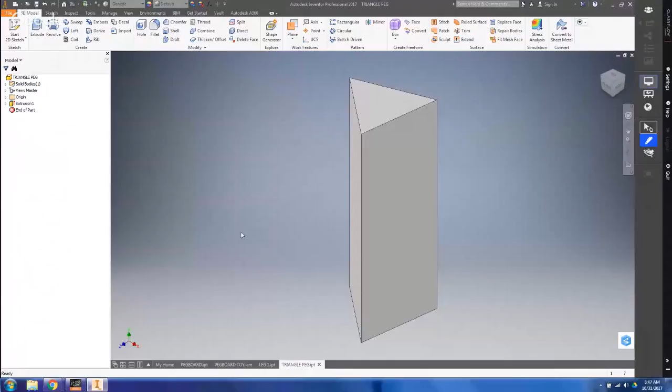Here's the triangle peg we had made, and now we need to go back and edit our pegboard part so we can add a triangle hole in it. Here's our pegboard part, I had already opened it up. Let's go ahead and make another sketch on this face.

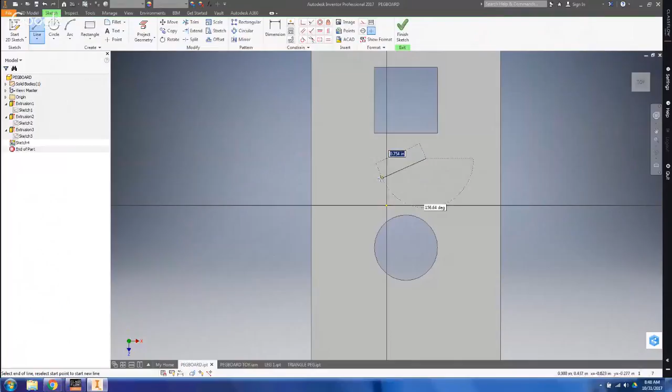I'll draw a triangle on the face here. It needs to be an equilateral triangle, so all sides need to be equal. I'm going to use that equal constraint on the ribbon to set all the sides equal.

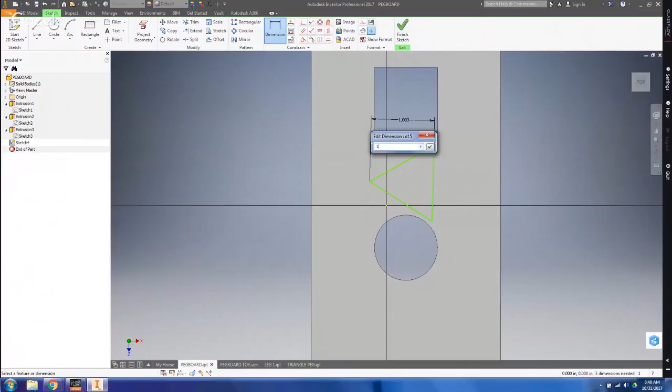It needs to have a height of 1 inch, so from here to that top point there should be 1 inch. That's pretty close already. I'm going to constrain some things so they're parallel — I want this here to be parallel to this. That just kind of makes our triangle so it's not crooked in there as a whole.

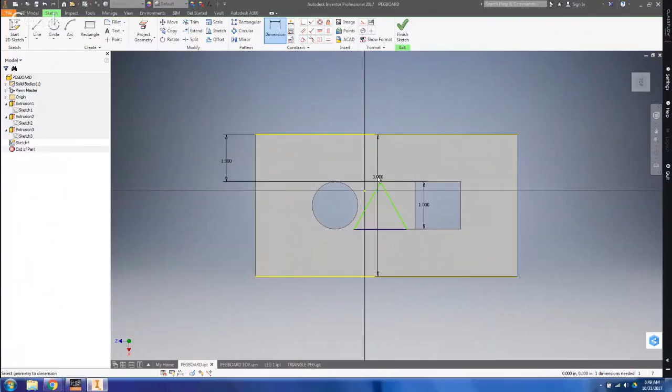I need to constrain a dimension here with the side of this face so the position of this triangle is 1 inch from it. And we actually need to center it too — I didn't think about that. So from here to here, that side to this top point.

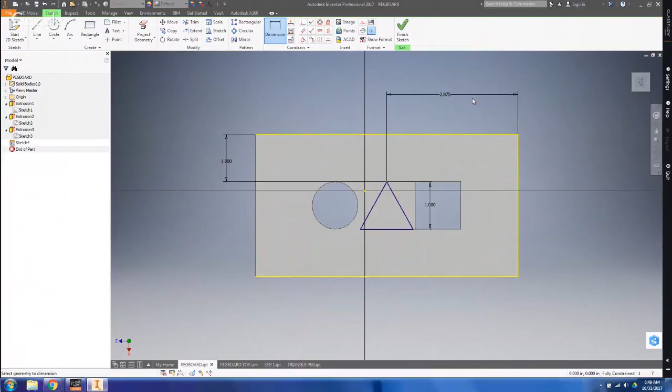I'll show you a little trick you can do here. I'm going to set this equal to 5.75 divided by 2, so that's half of that distance, and it does the math for me. It's 2.875 inches. It's a little tight, so I'm going to finish the sketch and extrude the hole.

I'm going to change the direction of it all the way through. And there it is. It's tight, it works, but I'd like to add some more space so these are equally spaced.

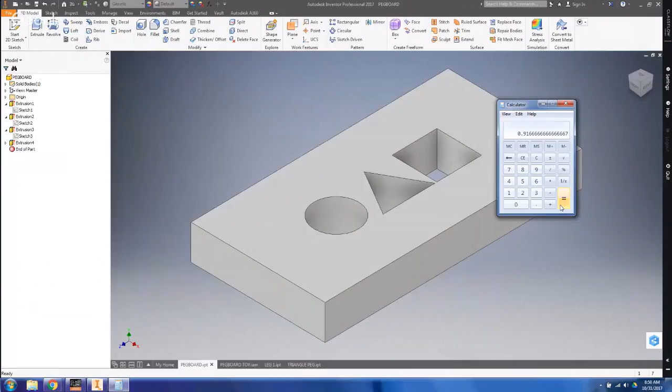Since this is 5 3/4 inch, and I know these holes take up 3 inches, that gives me 2 3/4 inches left over. If I divide that into 3 equal spaces, let's do some math here: 2.75 divided by 3, so that's about 1 inch from each other. I think I'll just go with that — I'm not going to mess with fractions of inches, I'll just go with 1 inch.

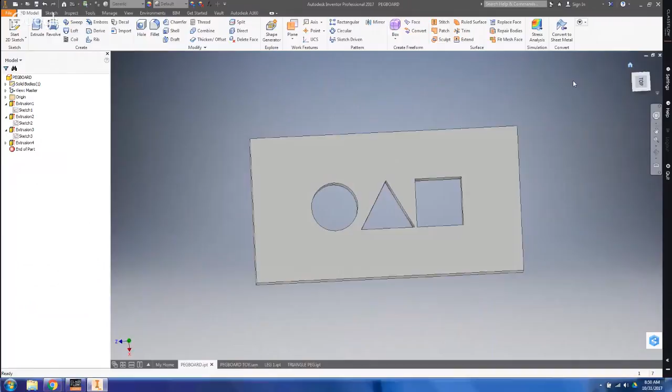So what I'll do is go back and find my circle extrusions — there it is, and inside here is my sketch. I'm just going to change this dimension to 1.5 inches, put it a little bit to the left. I'll finish that sketch, so that gives me a little bit of space there.

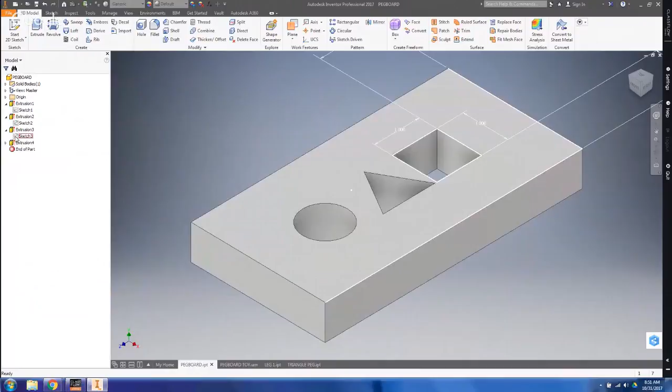I need to find my extrusion that I did on the square — there it is, there's a sketch there. I'll double click on the sketch. When you double click on the sketch, make sure you click on the sketch icon, not the letters, because that will just change the name of your sketch. So double click on the icon. Here this is — we're going to set this to be 1 inch.

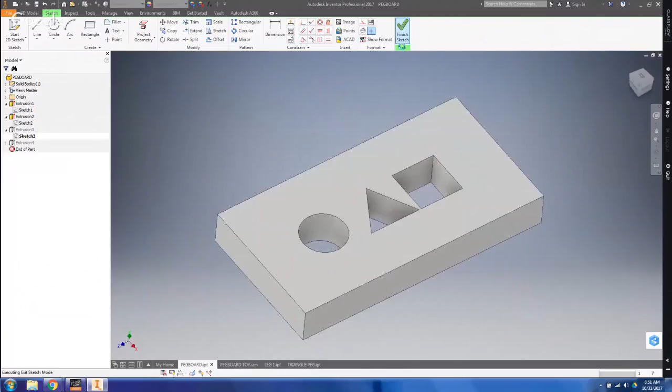Although they're not perfectly equally spaced, things are spaced out a little bit better. Okay, so that's what we're going for. When we save this, we'll update our assembly — save it real quick, and we'll go back to the assembly.

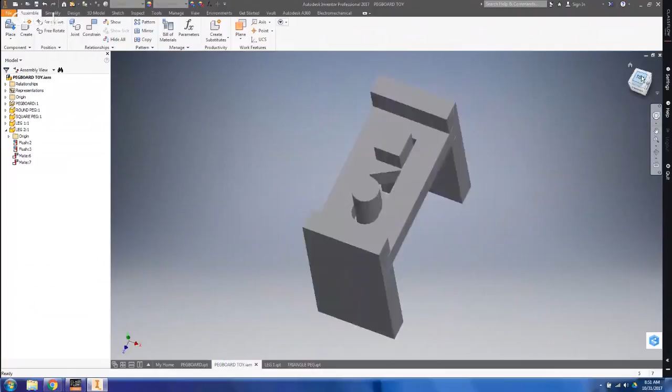Voila, there is our hole going on here. I think maybe we need to update the — oh, there it goes, the pegs went into the hole now. That's good, I was wondering what was going on there.

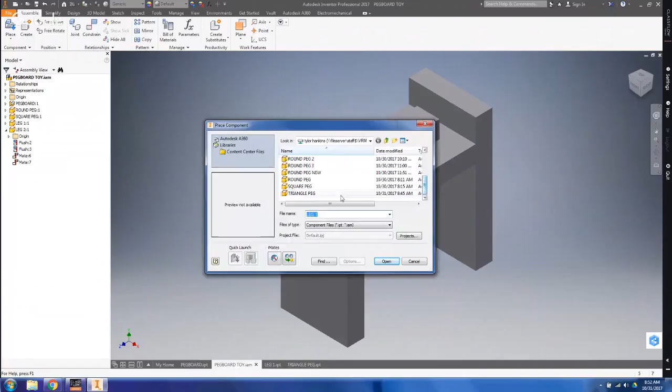So we just need to place now our triangle peg. We'll put it in here, and we'll have to constrain it. So we're going to mate this face here — we can do this face here.

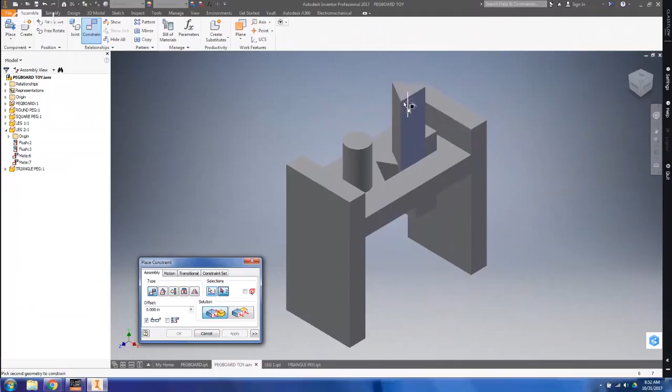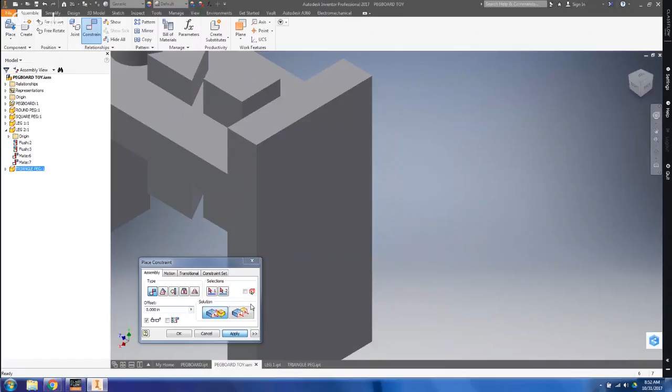As you can see, things are still moving around, so I'm going to hit escape here. I'm going to move this out a little bit, and constrain it now through another mate — this face to this face. And we should be good to go, so it looks like that's constrained into place.

Okay, I'm going to save. Our toy at this point is built — I've made it. So now all that's left is the mallet and the mallet head. I'll work on that next.